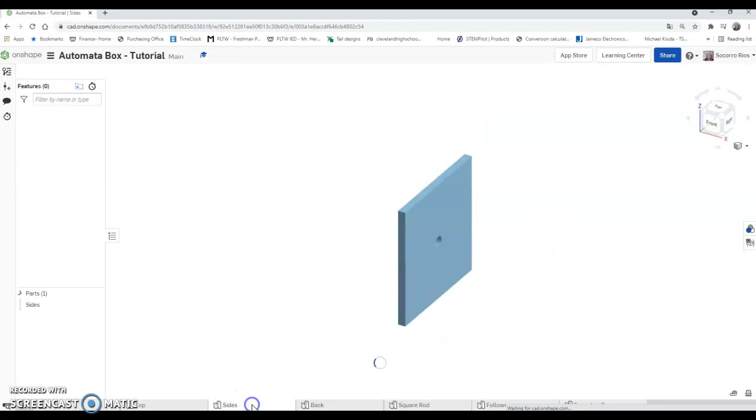Hi guys, I'm going to start with the assembly of the Automata box with all the parts that I have made. In the previous video you already have all the parts that you can see on the tabs at the bottom of the screen. I have the bottom part, the top, the sides, the back, the square rod, the follower, and only one cam because I will be only demonstrating one, but that will be enough for you to do the other cam that you have, or maybe 3, depends on your design.

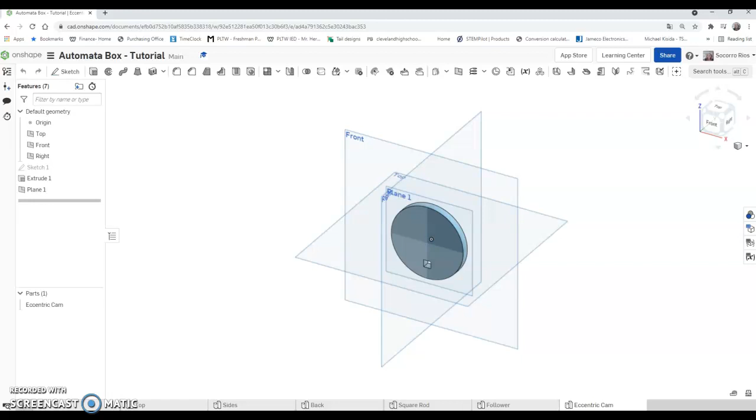So I will start by adding in assembly. I'm going to create an assembly right here, and I will start by inserting the bottom part. I'm going to click accept, and this bottom part is movable, which means it's not fixed yet and I have to fix it. Fix it means ground it, and I wanted also to align it with the origin. So that's what I'm going to do right now.

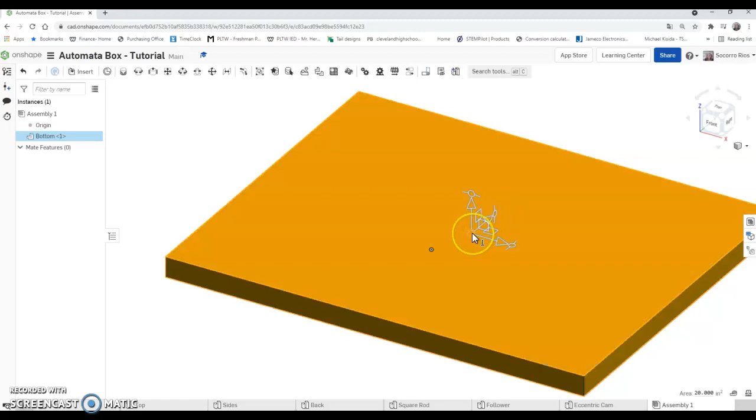I first found this operator, let me do it again. I click, and then I'm going to drag it until I find the actual center of gravity. I'm going to leave it there. I'm going to right click on the center right here, and then move to origin. The next thing that I will do is fix it. So I'm going to right click and fix. So now this is centered and fixed.

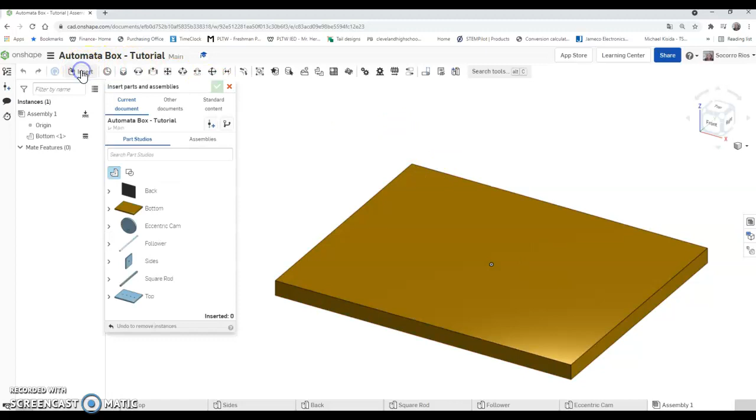The next thing is I'm going to add the sides. I didn't really have time to change color, so I'm just going to leave them like that. And I will constrain it to the bottom. Now we have to be careful constraining it because depending on what edge we select, that will be the edge that mates.

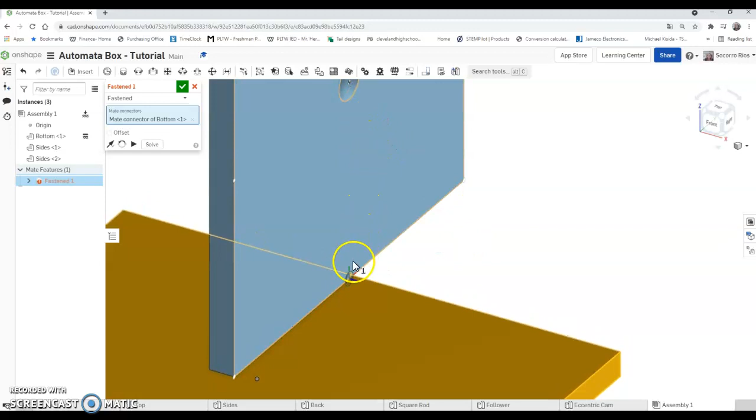So I'm going to start by adding a fasten mate right here, and I'm going to get closer to this bottom part, and then find the connector. This one, it must be right here. The colorful circle must be right there. And then I will do the same thing with the side. So I'm going to slide, and that's the one I actually need. So I'm going to accept. Now it's constrained, or mated.

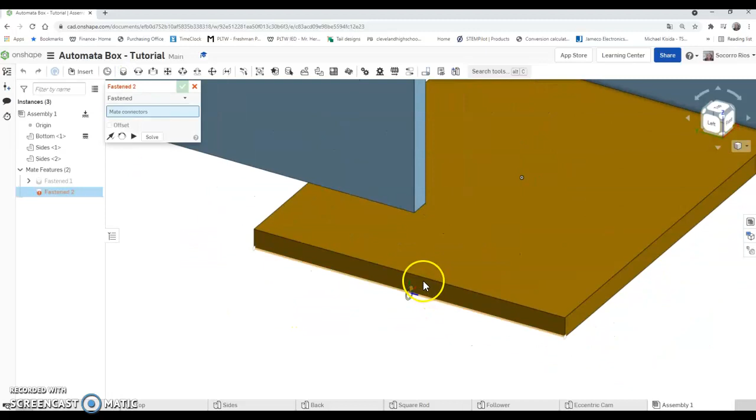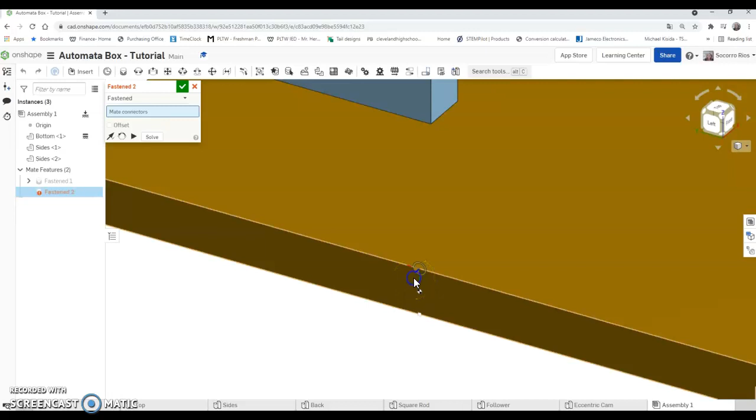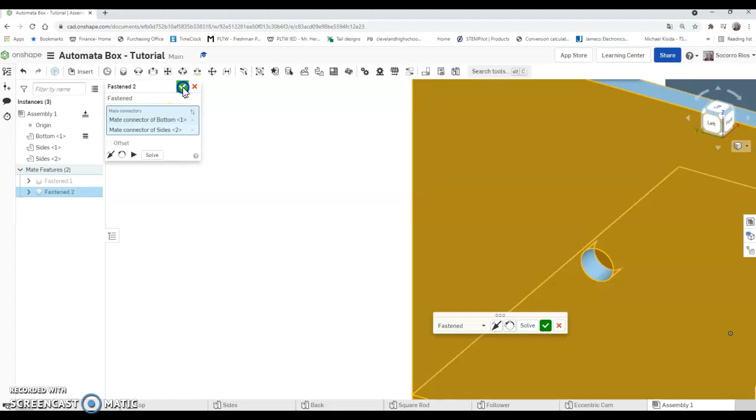I will do the same thing with the other side. So fasten mate. I'm going to get close, and I want to get closer to the center of gravity. So we have to be patient. Right there. That way has to be parallel to the side, the connector, and then I'm going here. I slide, click. Now both sides are being constrained.

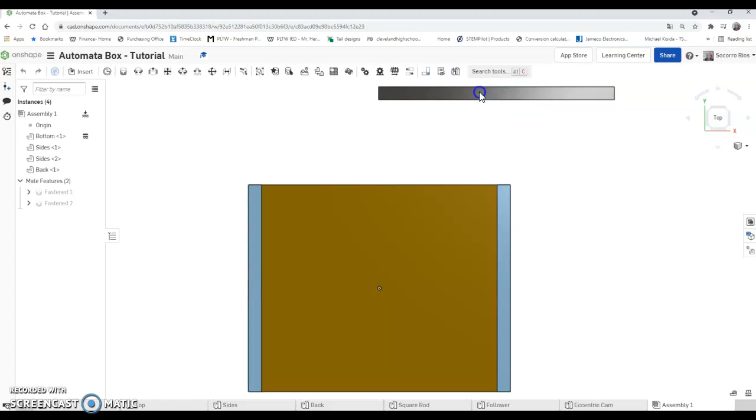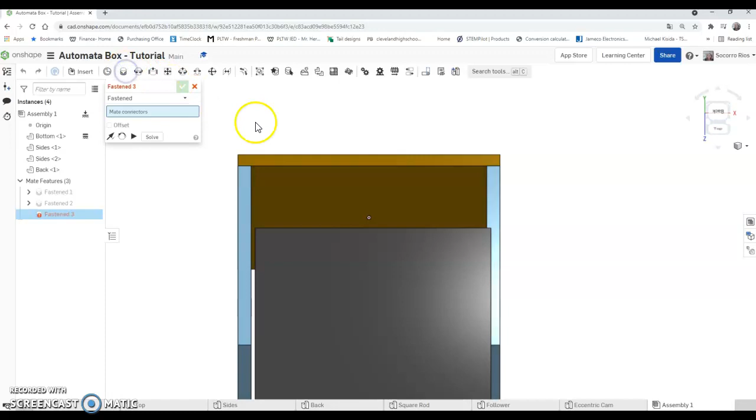Next, I'm going to insert the back. Click OK. We have to be careful with the back because we might get confused, but what we need to do is insert it inside right here. So I need to do the same thing: mate the edges using a fasten mate. I'm going to get closer. That one, with that one. I click accept. So my back is fully constrained.

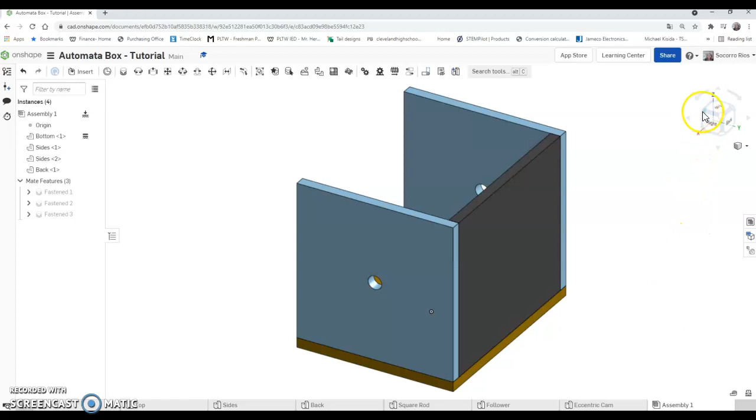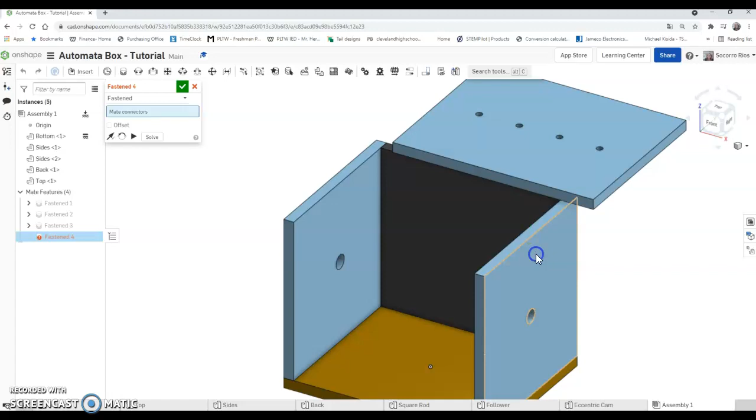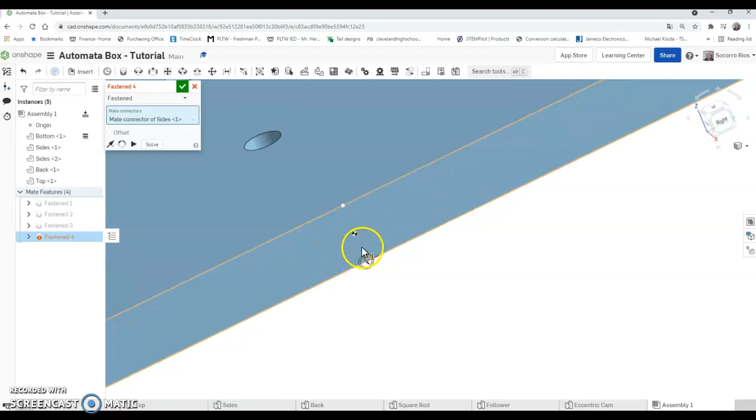Now I'm going to go get the top, and we're going to do exactly the same thing. I'm going to get the edge, use a fasten mate, that side. If you see the connector, it's in the middle on the top, and then I will find the one on the bottom. I need to rotate it. Probably I need to get closer. That's the one that I need. I accept.

And finally I have everything constrained, only the box. Next step will be to insert the square rod. Also I'm going to insert the eccentric cam and the follower.

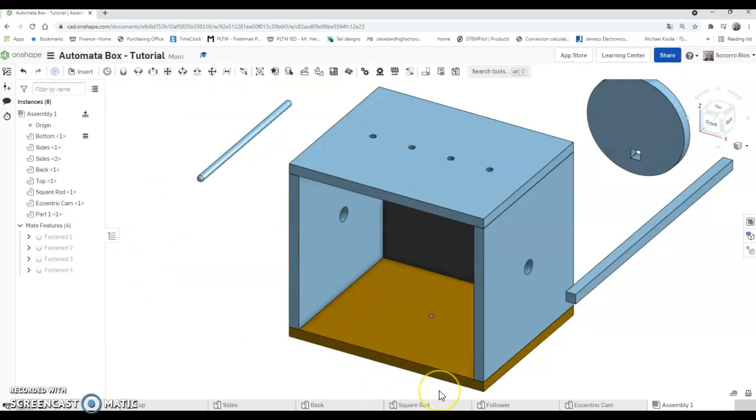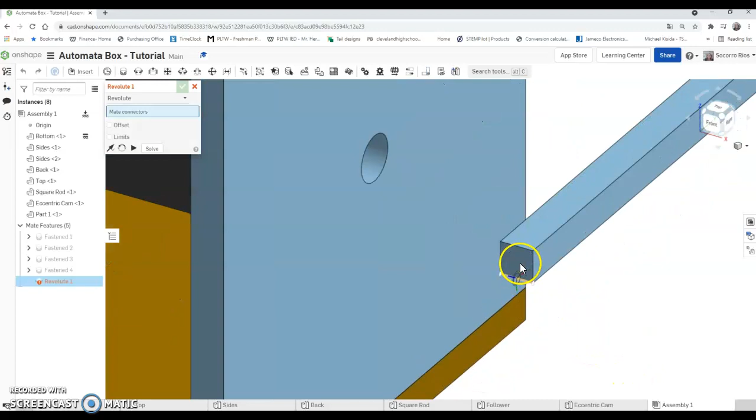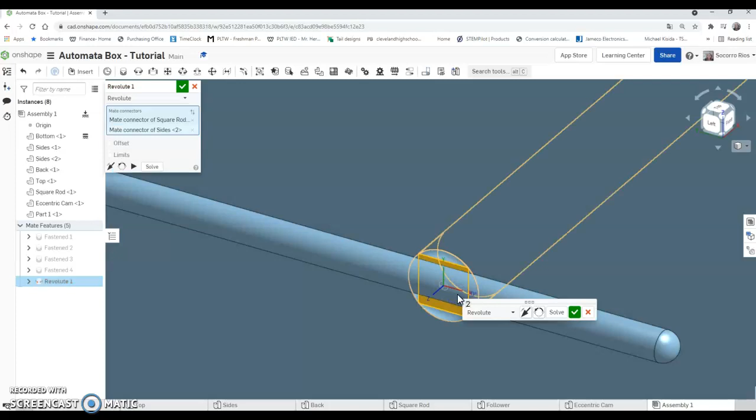Okay, so the first thing that I need to do is put this one, the square rod, into these two holes. For this, we're going to use the Revolute mate, which is this one. I'm going to click. Now I have to get closer to the square rod and find the center, so I need that to be connected to that hole. The follower is in the way, but it's not selecting it, it's only the hole. So I'm going to click there. What it does is drag it all the way to the edge of the hole.

So now I can see it. And if I animate it, you can see that it's moving, it's rotating, and that's the way it's supposed to be.

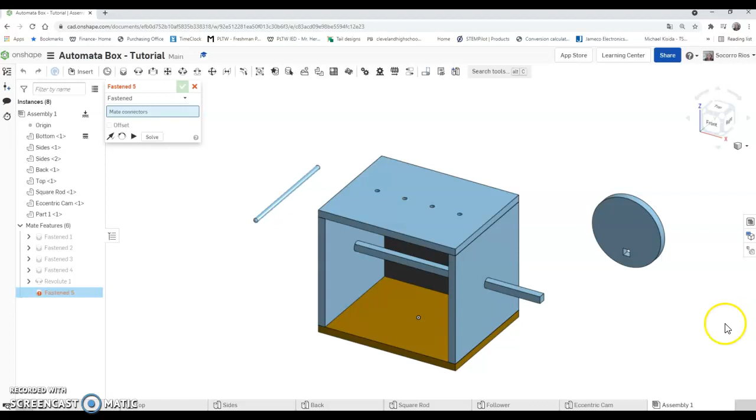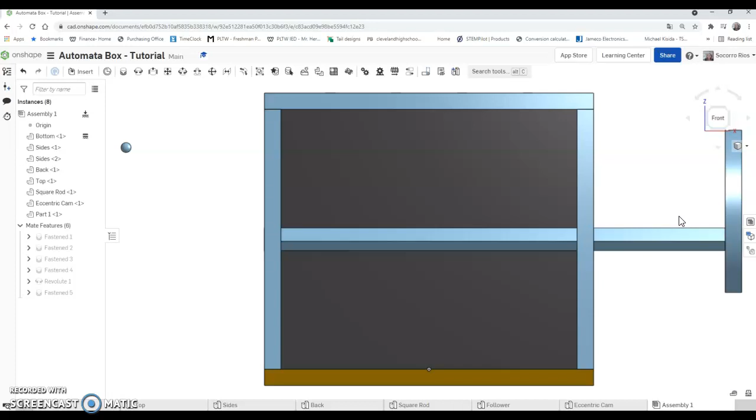Alright, next thing is I will constrain the cam to the square rod, and I will have to use another fasten mate. I'm going to click here, fasten mate. I'm going to get to this one right here, with the center, with the center. Now the problem is, if I leave it like this, I won't be able to move or align the cam to the hole, which is this hole, right? So I will have to double click again so I can edit the last mate.

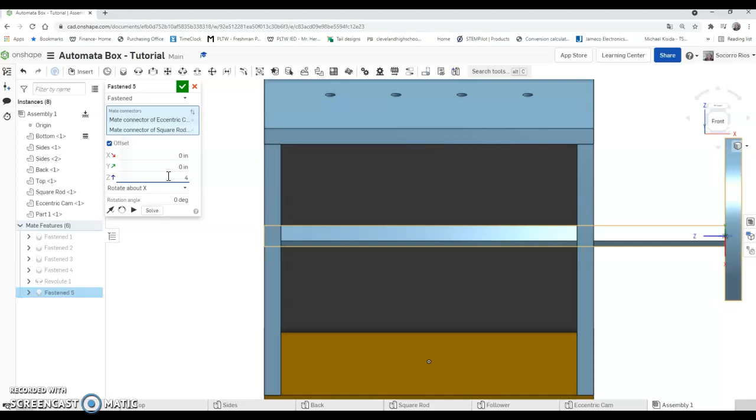Now, if you see, I need to slide the cam into the Z-axis, right? So I'm going to click offset, and I want to play with numbers. Let's see if 4 units will bring the cam inside underneath the hole. It does, but not in the place that I want. So I'm going to keep adding numbers. Instead of 4, I'm going to do 6. It does, but it's still missing a little bit more. So I'm going to continue.

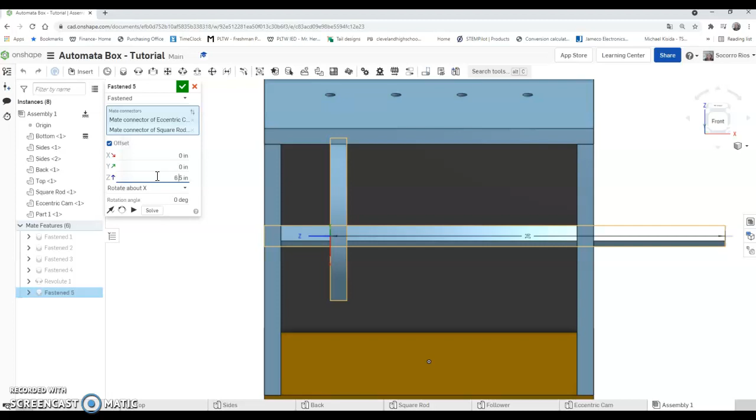Probably this is going to be 6.25. Let's see. No, so it went too far. So I'm going to do half of 0.25, which is 0.125. And with that value of 6.125, I will totally align it. Yours might be different, but in my case, that's the value that I need.

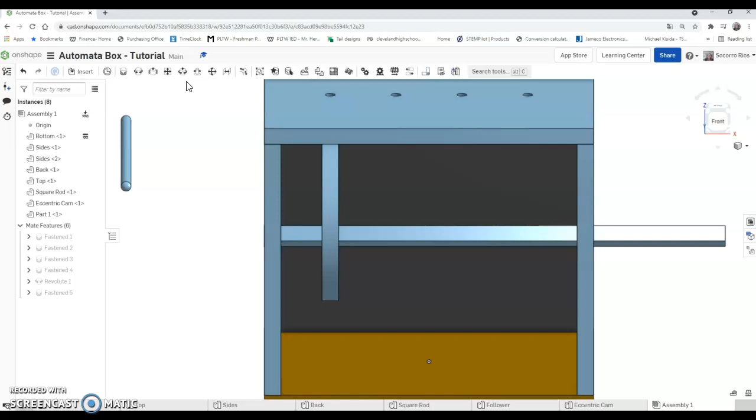Okay, so when I click here, I will animate this one so you can see that it's working. So as you can see, it rotates, it drags the cam. There you go. Perfect.

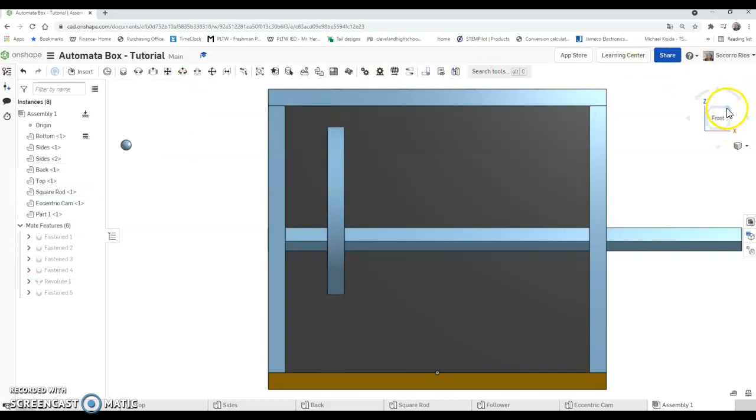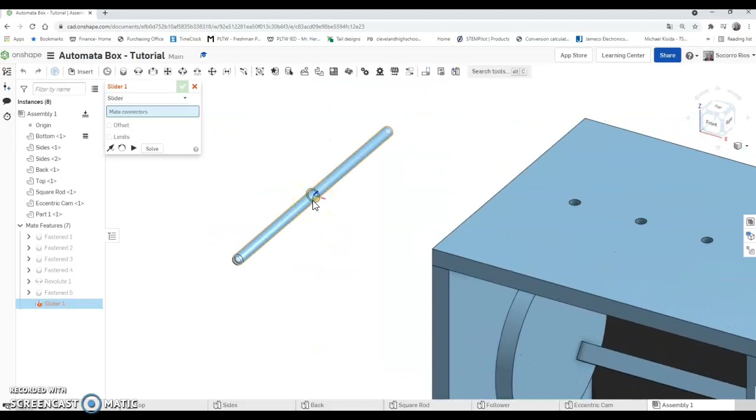Next, I need to put the follower into the hole, and for that, I will be using the slider mate, which is this one. Alright, so I'm going to click slider mate. I'm going to get closer to the follower. I'm going to use that one, probably this one, with this. I'm going to accept, and let's see how it looks.

And it slides. In real life, that doesn't happen, right? It doesn't go through the cam, the axle or square rod. So we need to do one more constraint, so the follower follows the cam. That's why the name of this stick is follower.

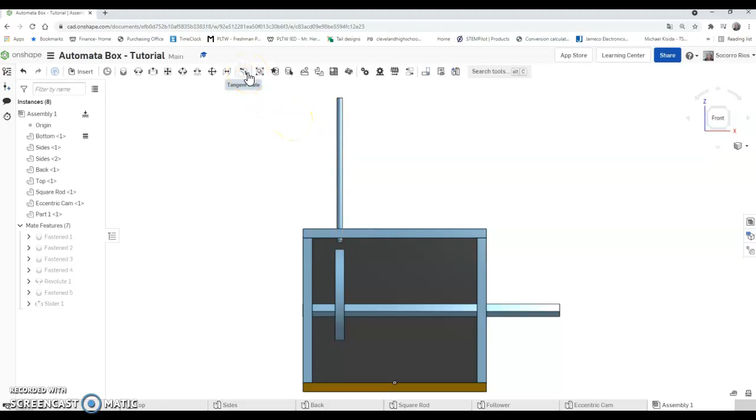So I'm going to use the tangent one, tangent mate. I'm going to click tangent. I'm going to go close. Let's see, oops. I'm going to select this with this. I'm going to accept.